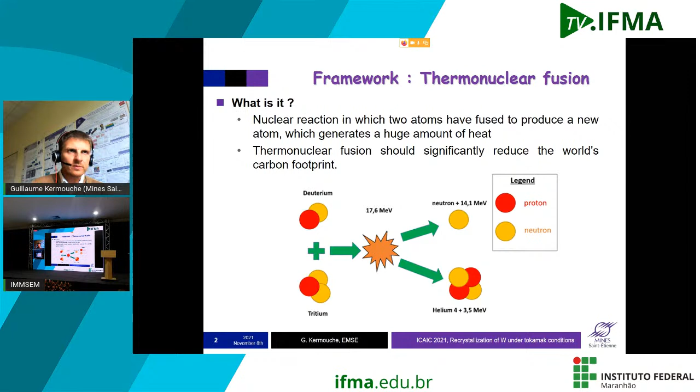Now, in terms of engineering, how to deal with thermonuclear fusion, we have to use what we call a tokamak. The nuclear reaction has to happen into a plasma that is a few millions of degrees hot. The plasma cannot be in contact with any solid materials, so it has to be confined, and this is magnetically confined in a vacuum chamber.

You can see here what looks like a tokamak, the ITER tokamak in France, which is under building now. This is 30 meters in dimension, 30 meters in this dimension, and the plasma will be here. This is the divertor, the material that has to face the plasma here. So it's quite huge.

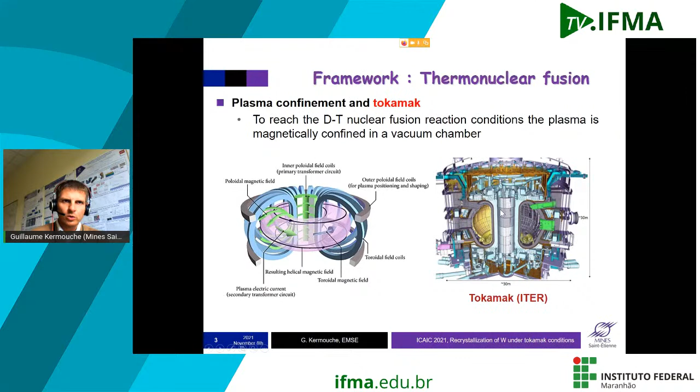You can understand that one of the main issues in thermonuclear fusion is first to achieve fusion, but it's also to find the materials that can resist this kind of nuclear reaction. So we have to design units we call plasma facing units, in the divertor, able to resist high heat flux, resist neutron and ion irradiation, and resist erosion, to make sure there are no impurities in the plasma.

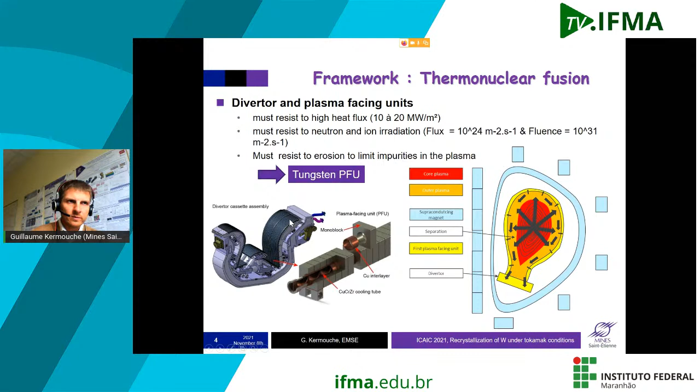The material chosen for that is tungsten, which has a very high melting point, and clearly the material here is made of tungsten.

So what is a plasma facing unit? This is an assembly of tungsten monoblocks, cooled with a liquid that flows into a copper tube. Each block is quite huge in dimension. Each PFU is constituted of 140 tungsten blocks, and there are 2,000 PFUs in ITER, basically in one reactor. That means 80 tons of tungsten just to resist the plasma.

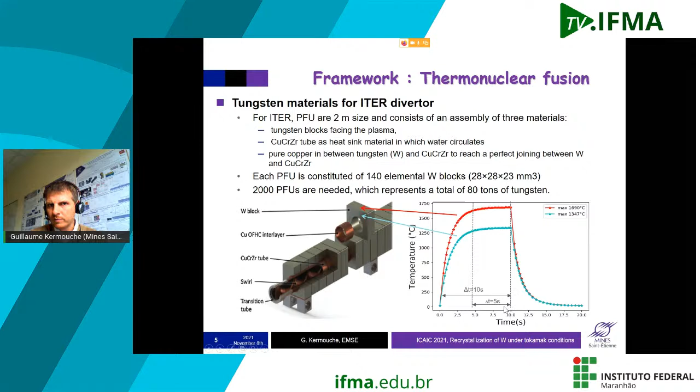So it's huge. Now, if we look at what happens to the tungsten during loading: it will be loaded up to 2,000 degrees sometimes, and a few millimeters beneath the surface this will be 1,000 degrees. The duration of the heat flux is about 10 seconds. What happens is that this is a cyclic thermal load between 100 degrees and 1,800 degrees, basically.

So when there is a cyclic solicitation, clearly there is some damage that can happen in the material, some thermal damage. So clearly, designing plasma facing units deals with fatigue damage.

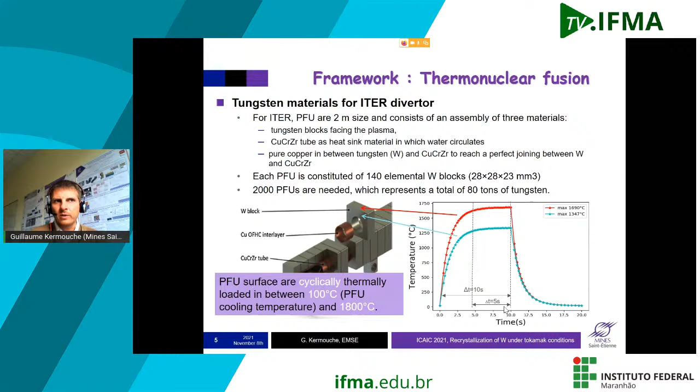Let's now focus on what happens on a single monoblock. You can see here a finite element model, a classical model, heat flux. Clearly, you can see the temperature gradient in the material, between 1,800 and 1,000 degrees Celsius here. And if you look at the microstructure of the material after a given number of cycles, maybe after 10 cycles, you will see that the material here is a bit different from the material in the depths.

To understand that, you have to consider that when the material is red, it means this is the raw material. It has been warm rolled, in this case for tungsten, so there's a lot of deformation, that's why it's red. Here you have a single color, meaning the grains are perfectly recrystallized. So there is a recrystallization that happens near the surface after a given number of cycles.

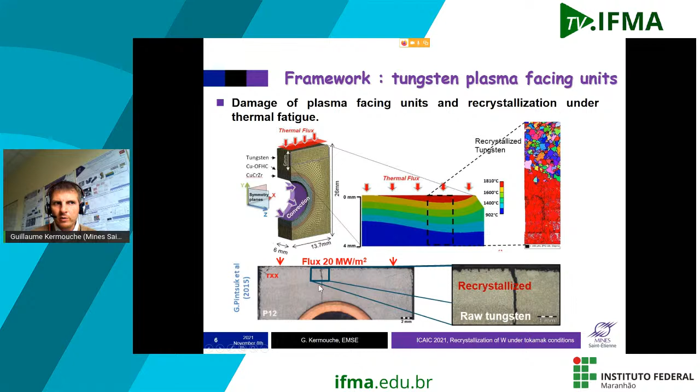If you look at what happened to the monoblocks in terms of damage, you can see a crack that will propagate from the surface to the copper tube. This matters, because if there is a crack and plasma enters it and reaches the copper tube, there will be melting of the copper, causing issues. So we have to prevent this crack. What we know is that this crack is finally driven by the recrystallization. So why does recrystallization drive the crack?

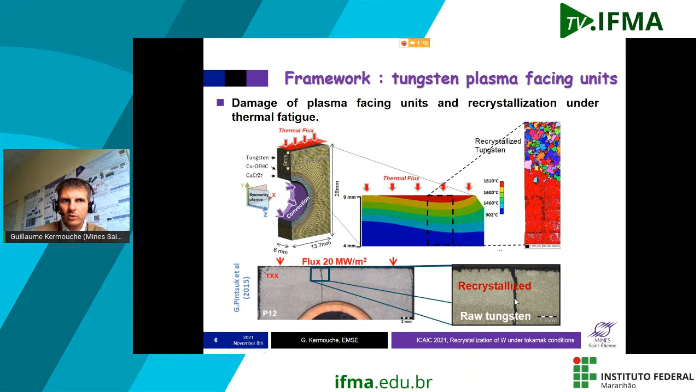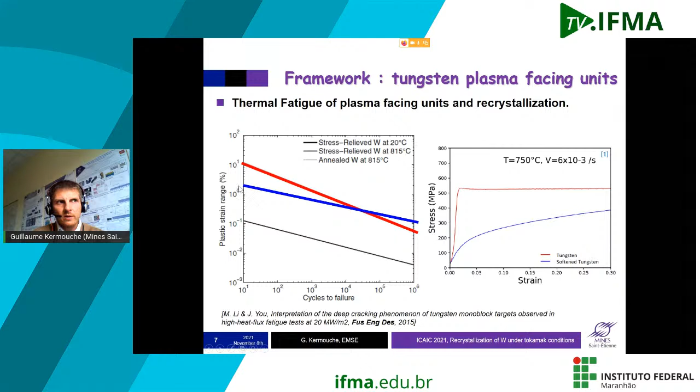Now if we consider the material, here we have the fatigue curve at high temperature, 800 degrees C, and the fatigue curve for the raw material, before recrystallization, the red part. You can see here the stress strain curve, and here the one for the recrystallized material, what we call softened tungsten. It has been recrystallized, so it's softer. What you can see is finally there's a shift from this curve to this curve, so it's better to use non-recrystallized material based on this curve.

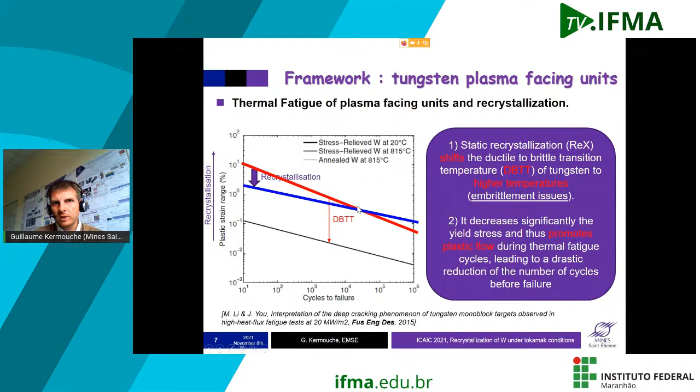Recrystallization will play on this, but it will also affect the plastic strain level, because the yield stress is lower. So at each cycle you will have much more plastic strain. So recrystallization clearly is not good for fatigue. The second aspect is that if some plastic strain happens at low temperature, you have to consider this curve to design the fatigue damage, and this curve is related to the ductile to brittle transition temperature. So recrystallization will play on the DBTT, but it will also play on the plastic flow that happens during each thermal cycle.

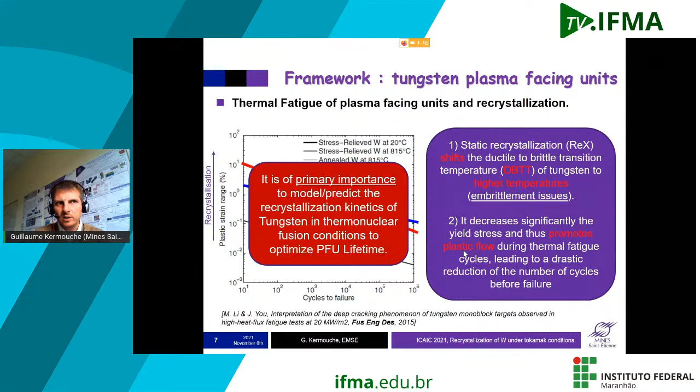So if we want to optimize PFU lifetime, it is clearly of primary importance to model and predict the recrystallization kinetics of tungsten materials, and that's the aim of this talk.

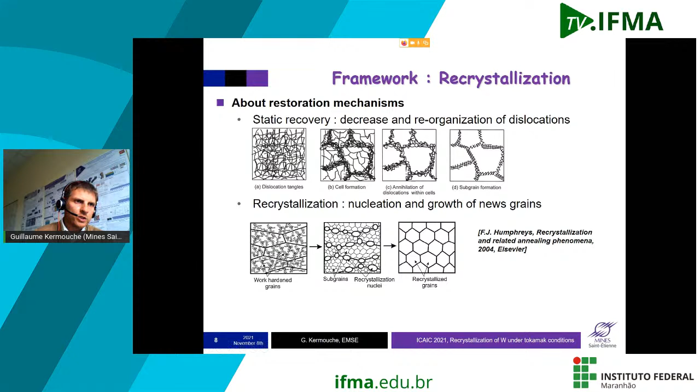The second one is recrystallization. This is totally different, because in this case a new grain nucleates in the microstructure, usually at the grain boundary, and this new grain will grow at the expense of the former microstructure. This is driven by the stored energy in the material, meaning the dislocation density. So these are two different mechanisms that can happen at high temperature, and they can compete.

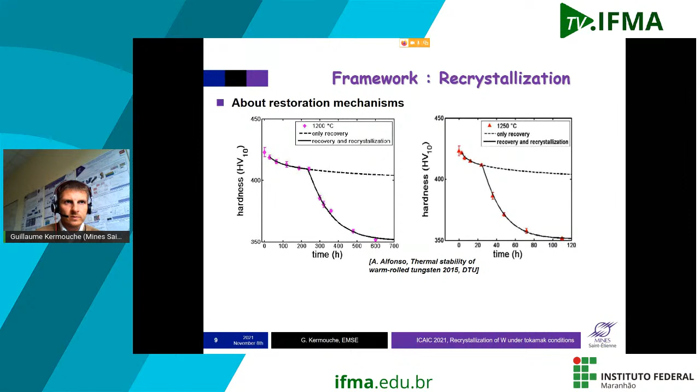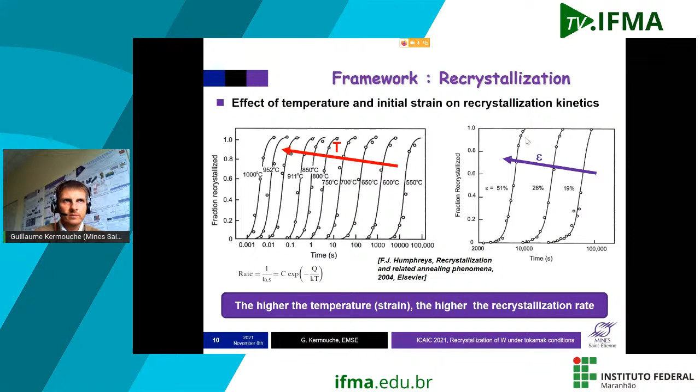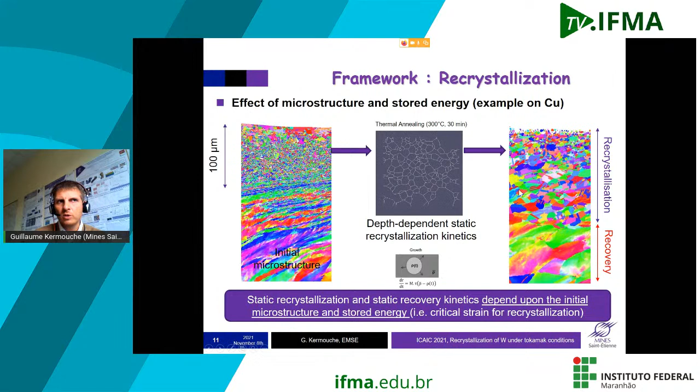So now, how do we predict the lifetime of PFU? We have to predict the restoration kinetics of tungsten materials under thermonuclear fusion conditions. We have to measure the restoration kinetics at high temperature, which is not so easy to do. We have to determine methods for characterizing the microstructural states related to recrystallization, and finally we have to develop some models for that purpose.

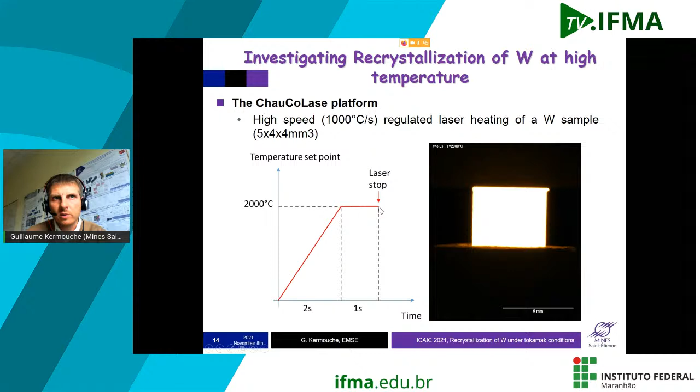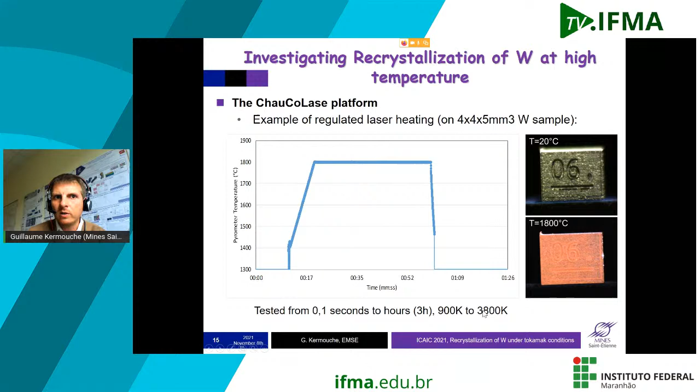Here you can see a test showing that the temperature regulation is quite good. Here is the heating stage, and then the temperature regulation can last up to 3 hours. So we can perform heat treatments lasting from a few seconds to a few hours, between 900 K and 3800 K.

So we have to use this kind of setup to go to very high temperature. Let's now present some results with this setup. Here you can see a recrystallization kinetics at high temperature, 1550 degrees Celsius, on a tungsten grade that can be used classically for ITER.

You can see here the evolution of the recrystallized fraction, meaning the ratio between the white area and the whole area on the microstructure. The recrystallized fraction increases with time until it reaches 100%. We have a small discrepancy between the recrystallized fraction measured from microstructural measurement and from hardness measurement. This comes from the fact that with hardness measurement, you also have to consider the competition with recovery, which we don't see with microstructural measurement.

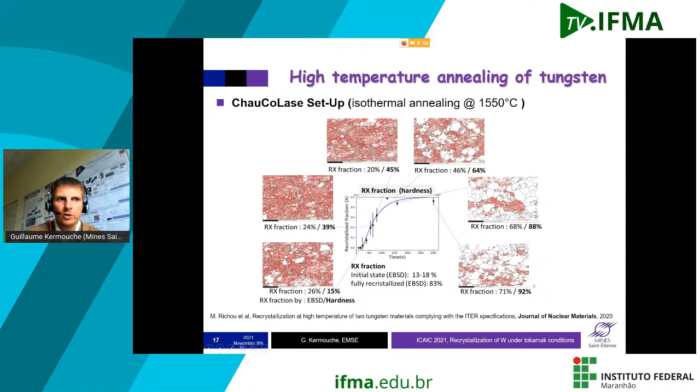Now, how to use this kind of results to design a new kind of PFU?

We compared here two materials, two tungsten grades from two different suppliers. One with a recrystallized fraction of 13%, the second one with 8%. The difference is not significant to us, but the main difference is in the microstructure. You can see here that finally the stored energy, the red in the microstructure, is clearly lower in this image than in this image. So there's a difference.

So how to analyze that? Here you can see the results of the heat treatment at different temperatures. This is the annealing time to reach 50% recrystallized fraction, and here is the annealing temperature.

If you consider the temperature of 1,550 degrees Celsius, clearly to reach 50% recrystallized fraction with batch A, you need 500 seconds. With batch B, it's about 1,000 seconds. So regarding PFU lifetime, it's better to use batch B material. The question is why grade B recrystallization kinetics is slower than grade A.

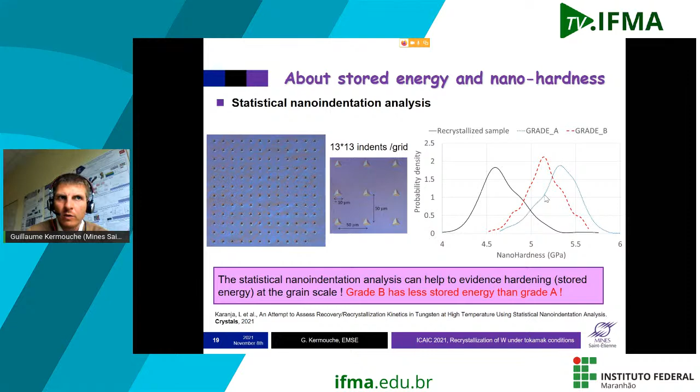Here you can see the results for the two batches, batch A in blue and batch B in red. What you can see is there's a clear difference in hardness distribution between grade B and grade A - hardness of grade A is higher in terms of nano hardness. That means there is much more stored energy in grade A, and finally it correlates with what we measured on this curve. So the difference between the two batches is related to the stored energy in the material.

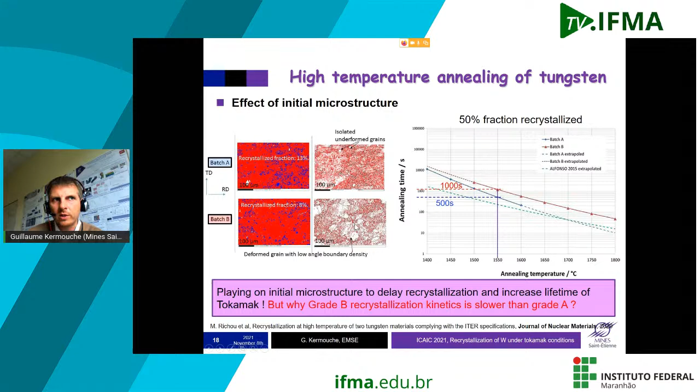From this kind of experiment, what we can do is measure what happens after some heat treatment. You can see the hardness distribution shift from right to left here. This is a consequence of recovery of the material, not recrystallization. It happens with time or with temperature, and from this kind of measurement we are able to measure the recovery kinetics.

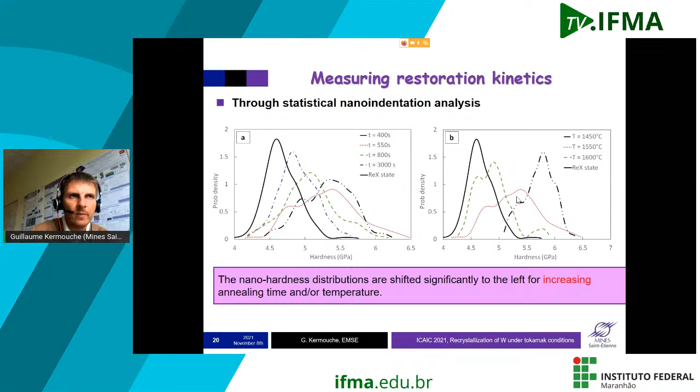Recovery - what does it mean? It means the decrease of dislocation density in the material. From hardness, we can relate hardness to stress, and relate stress to dislocation density. So we are able, with this kind of measurement, to estimate the dislocation density and analyze the decrease of dislocation density with time. From that, we are able to measure the parameters related to recovery for the different temperatures we tested. So we use this kind of data to evidence recovery.

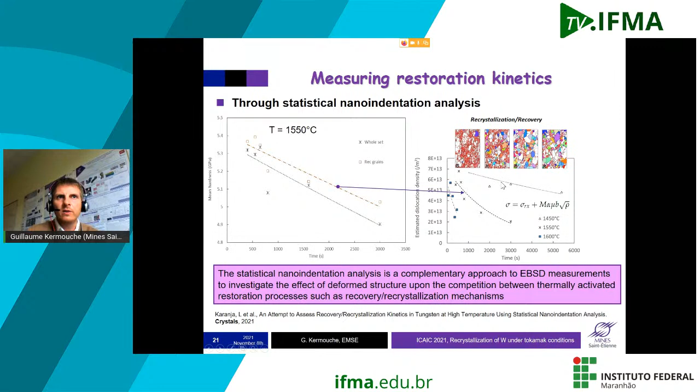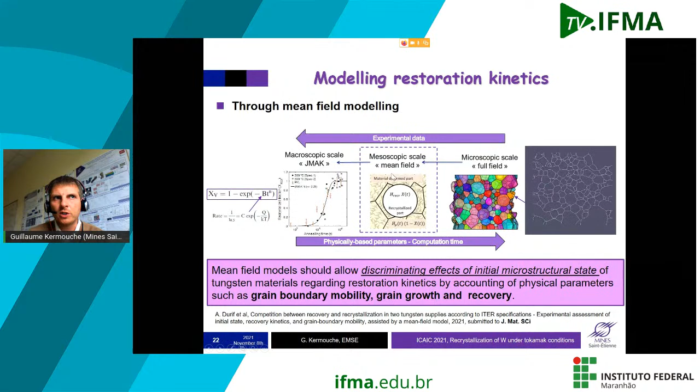In between, there is mean field modeling that we use. This considers each grain separately, but you don't need to model all the grains because a grain is related to what happens to the average microstructure. So we use physical parameters here, but the computation time is quite low.

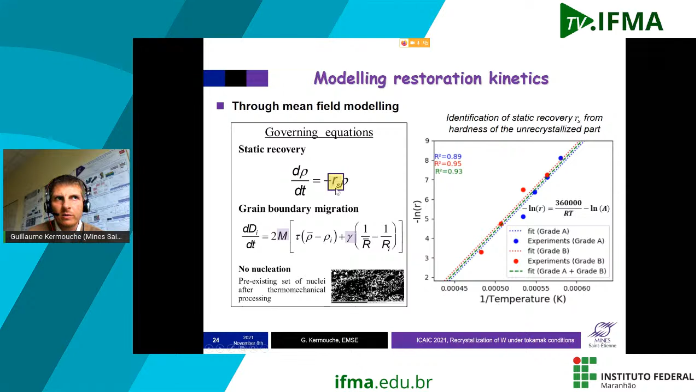Then we can work on the full microstructure, and with this algorithm - I won't detail it - we can model the kinetics. So to use this model, we need to identify this parameter and this parameter. This one is known; this one we can get from nano-indentation experiments or EBSD data.

You can see that for grade A and grade B, finally this is the same recovery parameters - we have the same results. And we can deal with the grain boundary mobility in the same manner - this is almost the same result for grade A and grade B.

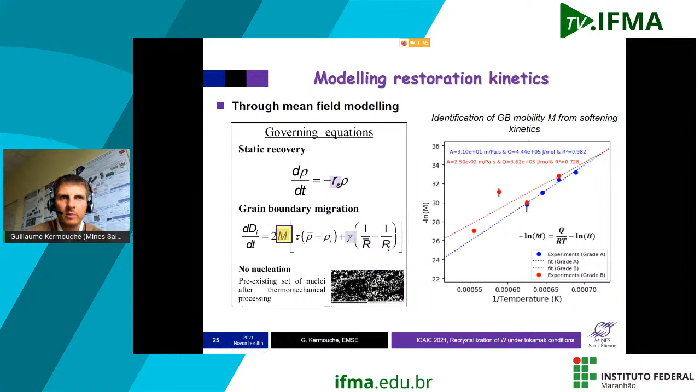So we use this kind of model to take into account the initial microstructure and finally to find the good initial microstructure. So I am at the end of the presentation.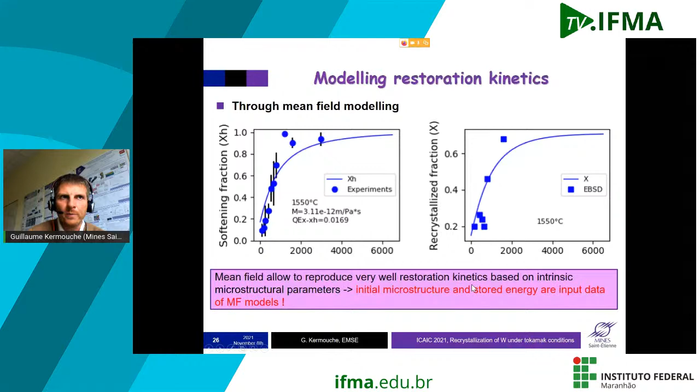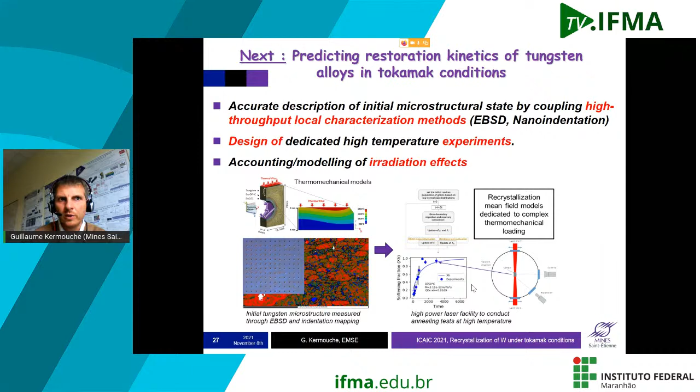So what we're doing now is trying to develop new methods of characterization to work on the initial state, because we know that we have to define the best initial state of the tungsten to optimize the lifetime of PFU. We design new high temperature experiments, and also try to account for and model irradiation effects during fusion. So thank you for your attention.

Do you hear me? Pode me ouvir? Yes, okay. Thank you, thank you for your brilliant presentation. So if somebody has a question, it's open for questions now. Somebody has a question? No question? I have a question, Professor.

During your presentation, an amazing result that surprised me a lot was about the softening that happened in the material. We see that the density of dislocations decreased, but this normally leads to lower hardness. And in tungsten, we saw that the recrystallized grain led to higher hardness. How could you explain this? That's the opposite of what normally happens in metal alloys.

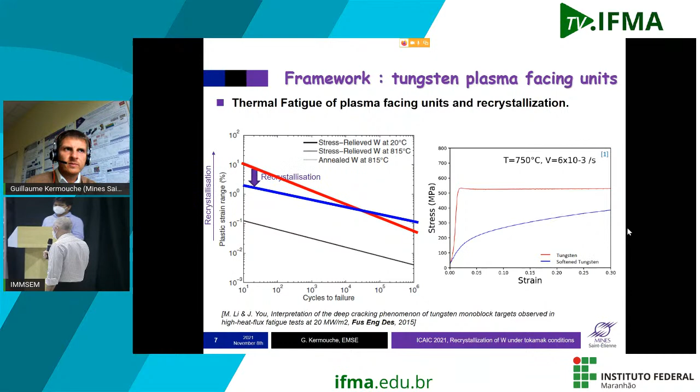Hi Professor Kermouche, thank you for your presentation. I have a quick question about the heating method you chose. Why did you choose such a complex heating system with lasers as opposed to another heating system, let's say a furnace or electric resistance, that would be enough to reach the very high heating rates you need?

Okay. So with the furnace oven, most of the time the heating rate is quite low. You can use some specific furnaces that can reach higher heating rates.

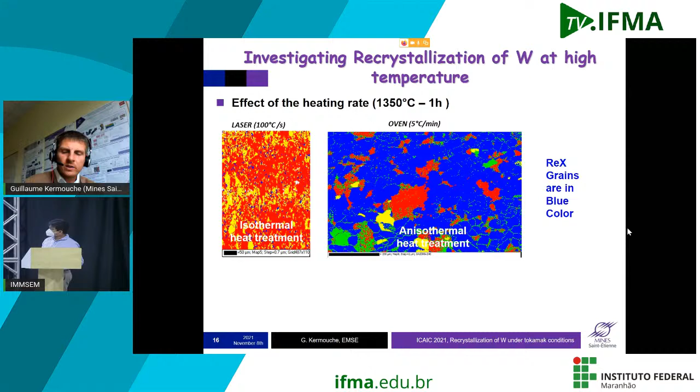Based on induction, basically we can use resistive heating, but in the case of tungsten, for us it was easier to use a laser heating setup, with some pyrometer and thermal camera to regulate the heating. So that's why we chose that. In a way, for us it was simpler than using another kind of heating device. We tried induction, it was not so easy, so that's why we moved to laser. And now it works quite well, so it's not so complex.